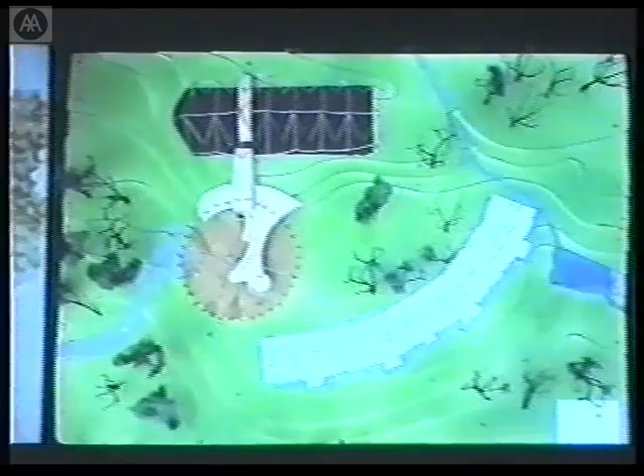And some models which we studied. On the left side was a central building, and just a tent out of wood, because we said that we could use those wet trees. The forest was planted, I think, in 56, and the trees did grow to a height of between 12 and 15 meters, very thin, and we tried to make buildings out of wet wood, where the wood should be drying in the building. As an experiment, because we had not the time to wait until these trees could be dry by themselves. Next pictures.

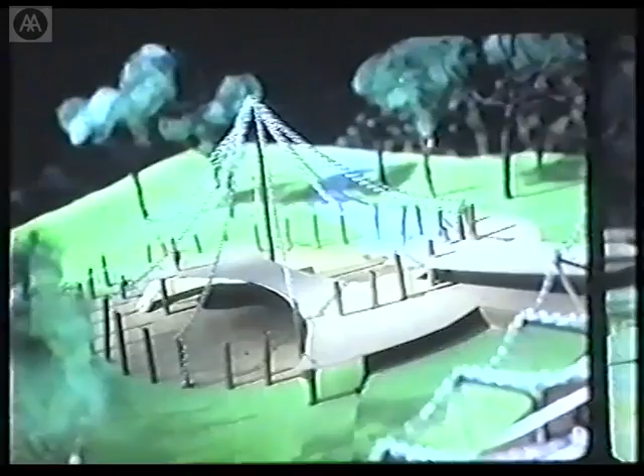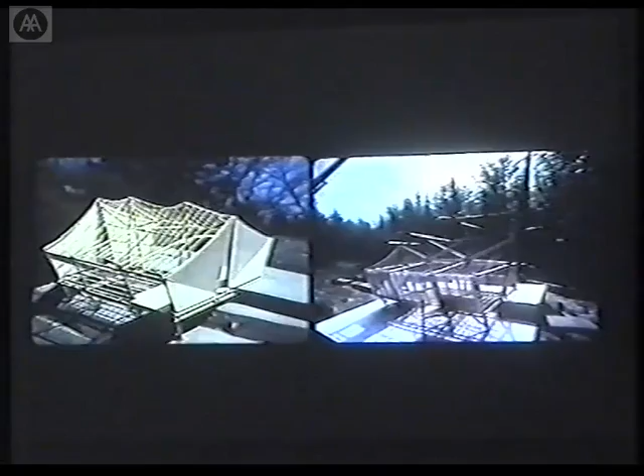This is the so-called master house. It is hanging trees from the ridge. On the right side, we studied the model on the site. If you have a little model, you should go to the site and look where the best site is. The site was beautiful. We remember the day when it was the first time on the site. The ground was blue, from bluebells. It was really beautiful. Next picture.

This is now the ready building. How you call it, master house, or I don't know what is the official name now of the house. There's no official name, but some of you are going tomorrow to Hooke Park and will see it. I have not seen it now for many years. I hope it's still existing.

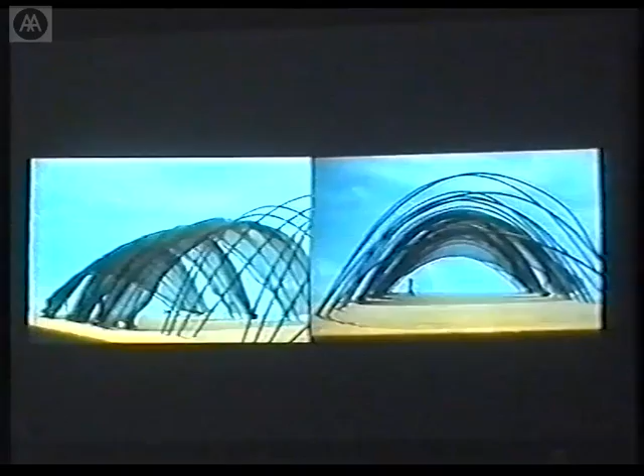Next picture, please. And for the workshop, we made models out of very thin stainless or brass bars, studying the shape. Later on, I used once more these experiments for the World's Fair in Hanover last year. There was a young Japanese architect, he's now pretty much known, Shigeru Ban, and we made the building together. But before we made Hooke Park, next picture please.

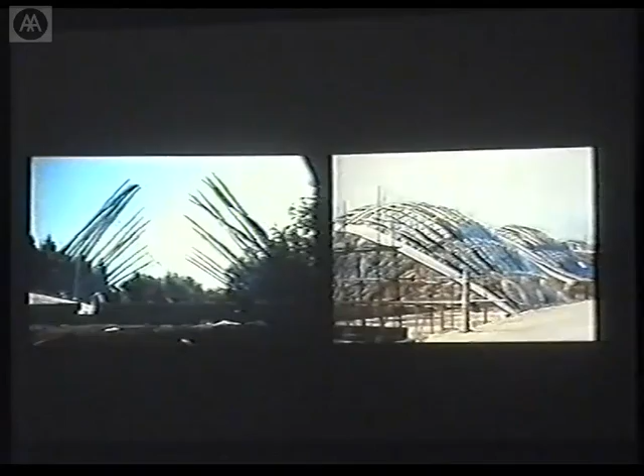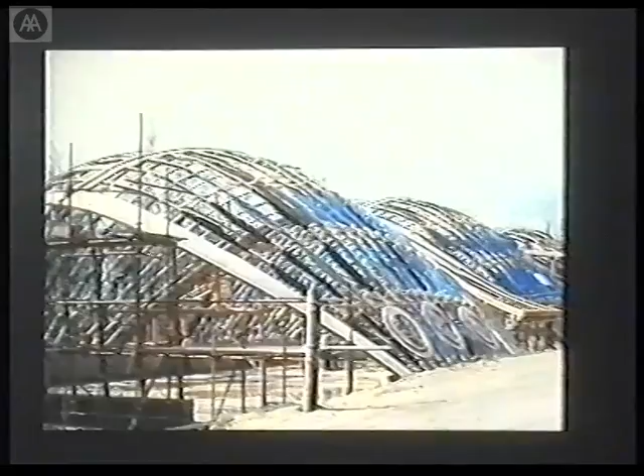And it was like this. You see the very thin members. We studied, of course, how they could be arches on the right side. We pulled them down to make a grid shell out of wooden arches, bending it just by power. Next picture. And this is then the workshop building. We covered it with a tensile membrane out of polyester, PVC coated. Next picture.

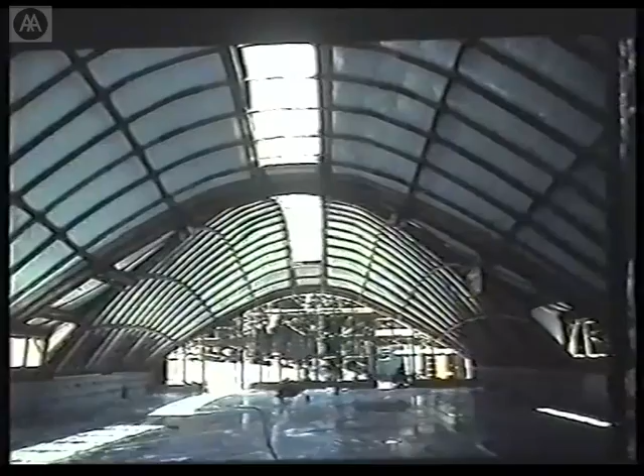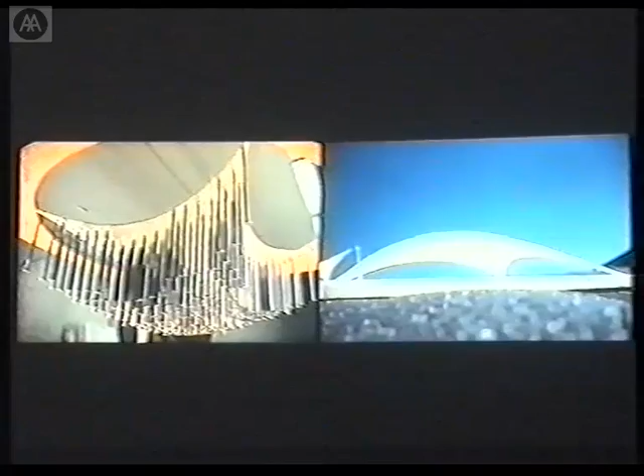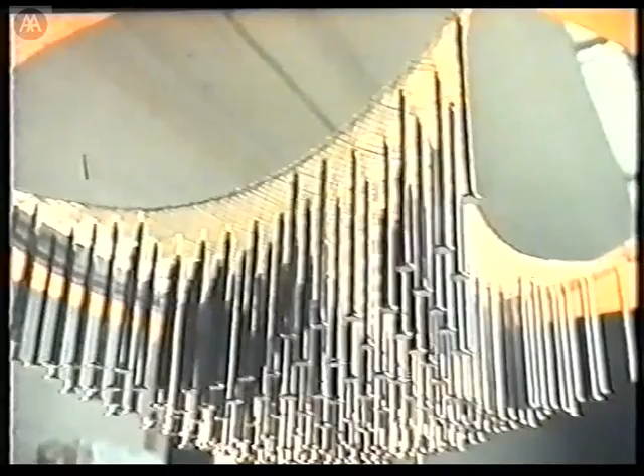And I will tell a little bit about modeling and how to bring buildings out of models. These tests I made in 1958 with my class at Washington University in St. Louis, USA, showing a rubber membrane loaded with nails, and later on converted to make it a shell under compression. We call all these structures shells without bending. They are related to old vaults, which were invented long before the Romans. Next picture.

My largest building was the so-called Multihalle in Mannheim, done together with the architects Mutschler and Langner in Germany. The engineers were Ove Arup and Partners, at the time when Ted Happold was the leader of the so-called Structures 3, a kind of fire police for problematic projects. But it happened that Ove Arup asked me, if you do a building like this, I would like to do it. And it happened that the German engineer we had on site, whom we should use, said that it is too much for me. I have not the courage to build this building.

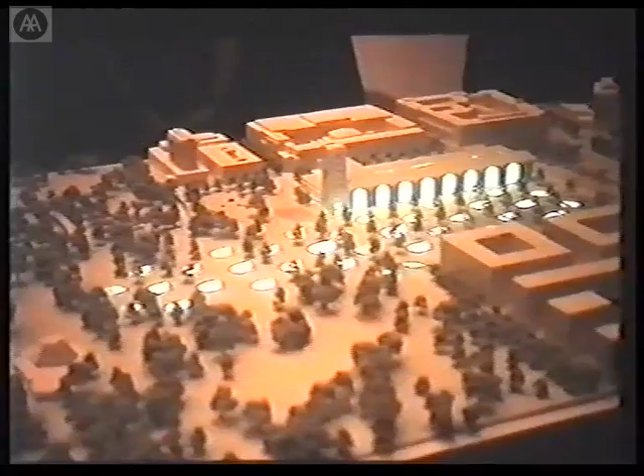And the trains are on the upper level. It's a so-called end station. And this station should be turned into, I don't have the English word, a through station, which is at a right angle. And on the right side you see our design for the competition, to be 12 meters under the ground, and to have open holes which are supported by columns.

And I offered to Christoph Ingenhoven, firstly the engineer, of course, the Bureau Happold, and especially involved is Michael Dickson and now also Ian Liddell, and joined them together with Fritz Leonhardt, the very well-known German engineer. Maybe you know he invented the concrete television towers and built many suspension bridges.

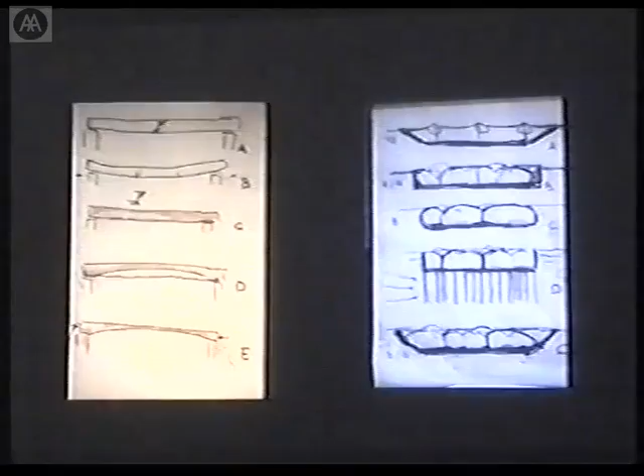So, next picture. But how to solve the question? I give some sketches because the railroad station is only between 9 and 12 meters underground. It is 430 meters long, nearly 100 meters wide, and had only a room between the surface of earth and streets of these 9 to 12 meters. Very important is now how thick you could make the ceiling, which should be planted, because the room is going away.

And so I remember, if you make a big concrete plate, it should be nearly 2 meters thick. We decided that it is necessary that the columns are about 34 meters away. It should be a very, very flat space. It would be the largest space of the city of Stuttgart. Stuttgart has about 600,000 inhabitants, but all around are about 2 million in the so-called outer region.

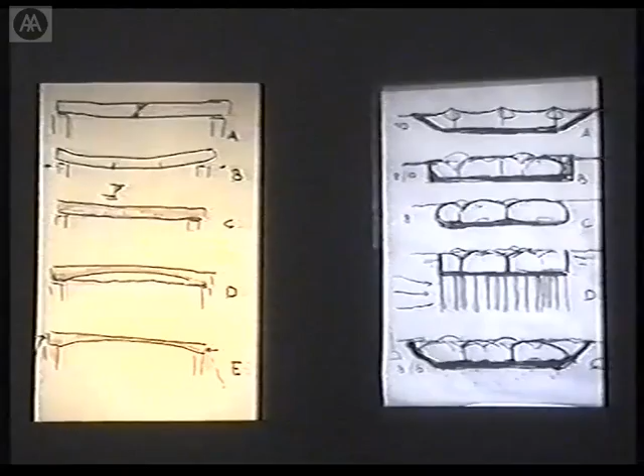And the question is always how good is the knowledge of the engineers. And we know that to calculate reinforced concrete, it is somewhat, I will not say superficial, it is very good for normal buildings of small span. But for longer span, there are problems, because normal concrete always will break. You can, of course, pre-tension it, but with pre-tensioning you can bring the 2 meters down to maybe 1.50 meters, but not more.

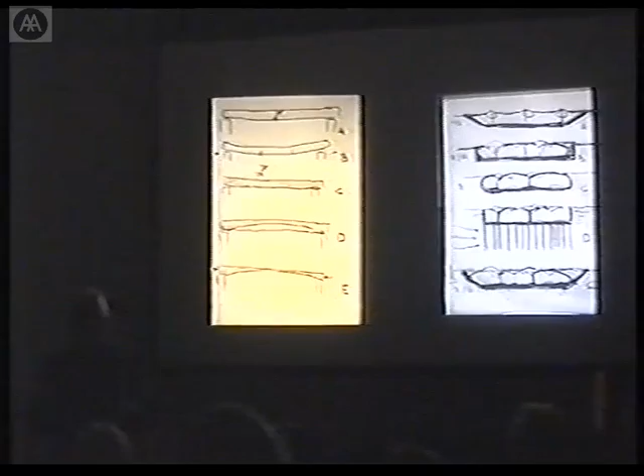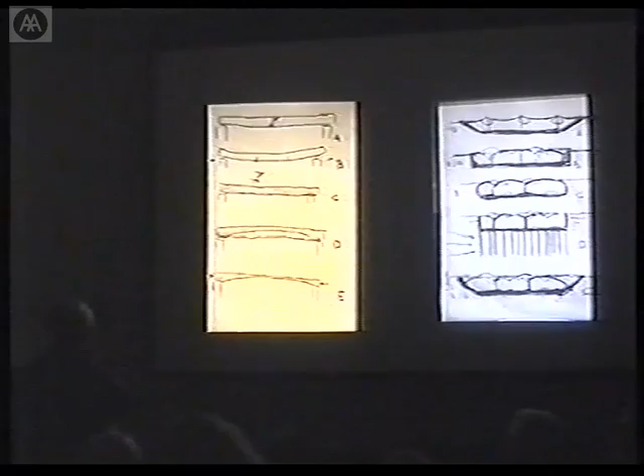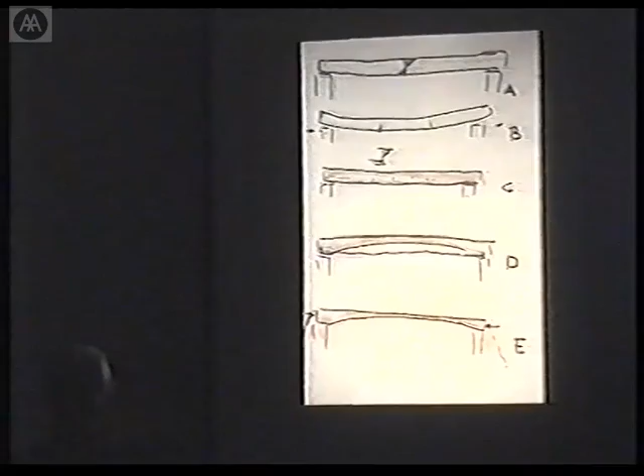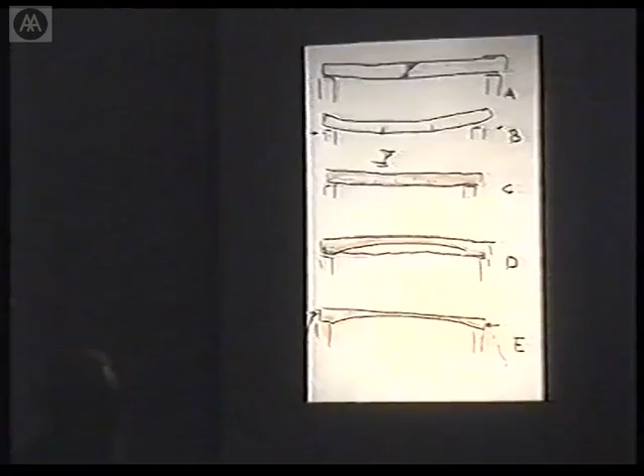And you are calculating with the elastic theory, but there is another way of calculating it. I show you on the left picture. If you put all concrete away which is not in compression, then you will have a two-dimensional thin shell in the concrete. And you could also calculate it in a way which is shown on the left side. But still, then you would have the tension members 2 meters underneath, and we could not use these tension members.

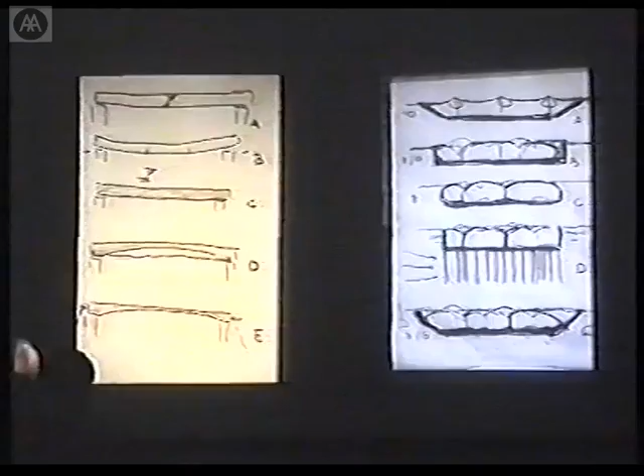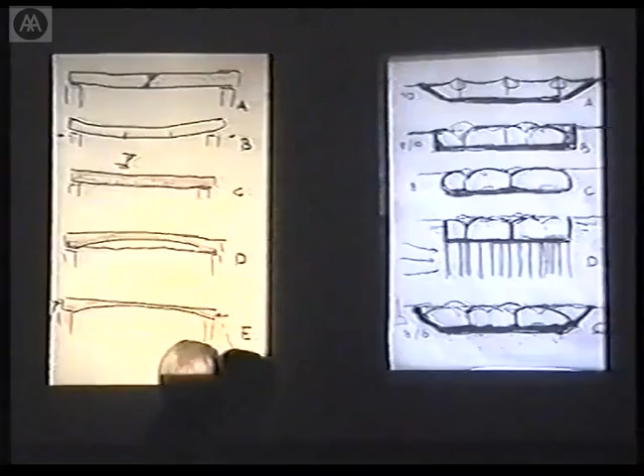On the right-hand sketch, you see the many possibilities which we had to solve this incredible equation, and just to dig a valley. The valley will be filled with groundwater in a few minutes, because the railroad is crossing a little stream going out of Stuttgart. Stuttgart is a huge funnel, and there is big water sometimes in rainstorms. So the first upper line was what we did at first, to make this valley and to hang over the valley a tension structure.

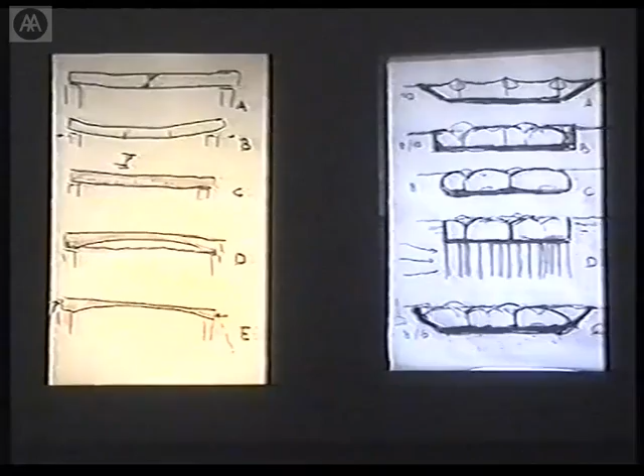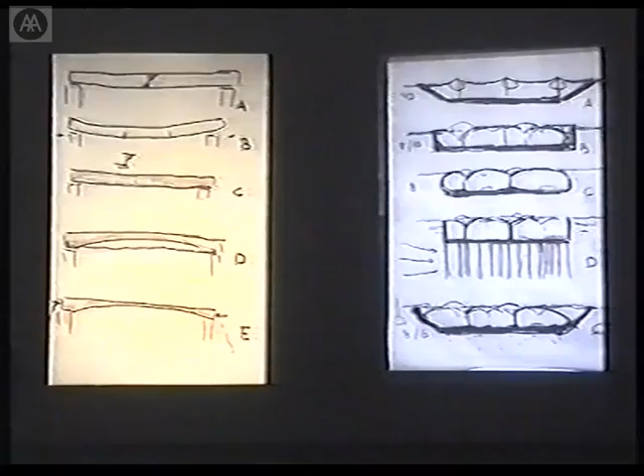But then we started also because the client wanted a section which is under the second sketch there. We studied all different ways, and we are still studying, because it may need 2 further years before the building will be started, and it will not be ready before nearly 2020. It's a very, very difficult question, and I do not know if I will see the building. Next picture.

And for the first step, of course, you are always using things which you have done. So I was thinking for the railroad station Stuttgart to use a cable net, which I have done for this building. Next picture, it is the Montreal Pavilion. Or for the Olympics, we had a cable net, and we studied also to use the cable net and to plant it. Next picture.

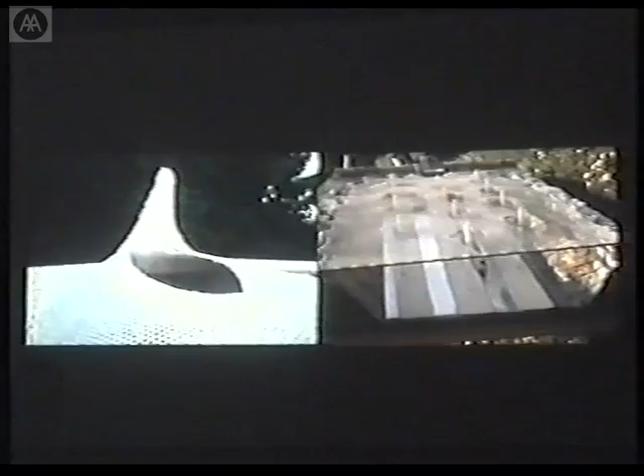And this solution was coming out at the beginning, but we had only 3 months' time for the competition. You see the cable net, and this would be the structure. Underneath the point will be a mast, and I tried also to reduce the railroad station. That's for 6 lanes, but we have to build it now with 8 lanes. Next picture.

Then we studied the so-called hydrostatic shell. In the ground, and you know it from the London subways, the best shape of a tunnel, especially in groundwater, and we are here in groundwater, is the shape of a tube or a fire hose which is filled with water. This is the so-called water shape, and you can reverse this into a shell and you get shapes like this.

Of course, they are difficult to calculate. Next picture. Next, please.

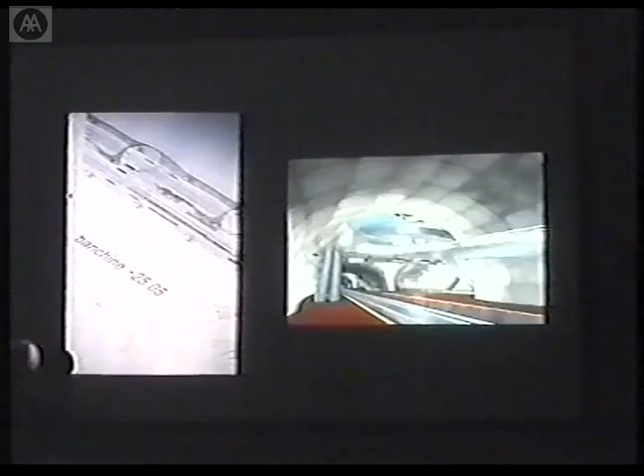We have done it. We have been invited by Italian friends and architects for a competition for the railroad station in Florence. And we offered such a hydrostatic shell, but this is much lower. It is about 24 meters below the city of Florence. The tunnels are driven just underneath the city.

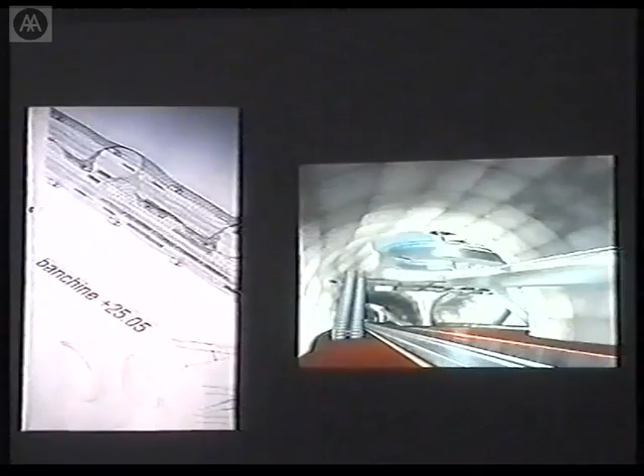But it is possible now to calculate it, to do models and to calculate it, and also the groundwater flow is above the tunnel, between gravel, and we should not destroy it, because the plan of the Italians was just to make a big caisson, and they stopped all groundwater. It will become an ecological problem. Next picture.

But once more back to Stuttgart. If we have to solve this problem with a kind of a shell, we have once more to study what is a shell, what is an arch. And since Hooke, the famous physicist and mathematician, we know that we can invert a hanging chain into a self-standing arch, or a grid of chains into a standing shell.

As I have shown you with the Gaudí model, Gaudí used this method just 100 years ago, but before there was a German architect for the city of Karlsruhe and many others, but no one has proved this idea: I take a chain and let it stand, and the standing arch in the best shape is exactly like the hanging chain. So I used those methods at my Institute of Lightweight Structures in Stuttgart, and we made tests, built it exactly as an arch, even also under load on the right side.

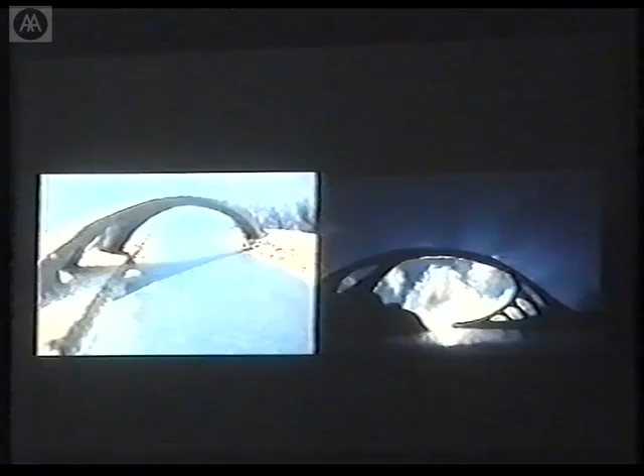When we made these studies, automatically we came to a shape, and here we invented an S-curve arch, maybe to go over the water. Very often a street will move from one side of the stream to another one, and automatically you need an arch which is in floor plan an S-curve. And also we made the design for a bridge which has a floor plan more like a U. Next picture.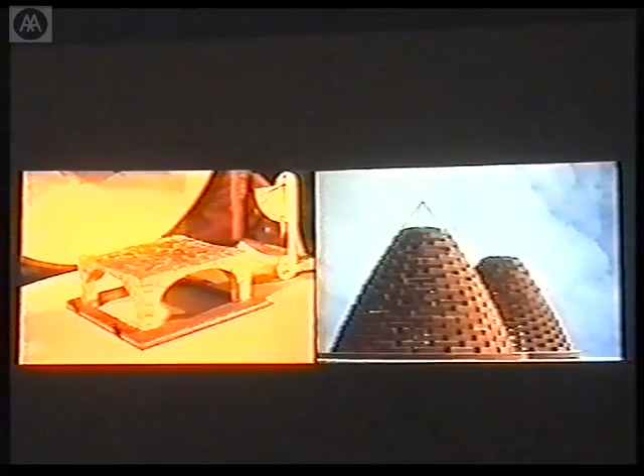And in this way, to make a shell without bending, and a shell without bending is always a vault, especially out of concrete. It starts to break, and it's out of stone. The oldest method to make it is a so-called cross vault, which is standing. This little model is standing without collapsing, but it's out of wooden stones. It doesn't matter if you make the model out of wood or stone or lead. You can use all materials, because to get the shape, the material is completely free. Only when the material is too flexible, then it could collapse a little bit earlier.

On the right side, this is the oldest method to make roofs or walls with stone, the so-called free laid dome. It is not even necessary that the stones be joined together. The friction is enough. I was many years ago on the Shetland Islands, and I discovered that about 2 or 3,000 years before Christ, these kinds of domes had been built, meaning 5,000 years ago, in the Shetlands. They are now broken, but the base still exists. Very interesting how early people in your country started to make these buildings.

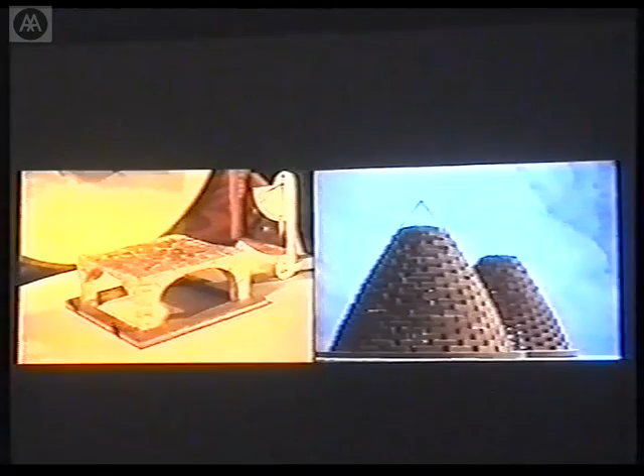Next picture. But we are still on the railroad station Stuttgart. How to do it? To combine an air hole so that air and light can come into this huge space. Believe it, 100 meters by 430 meters. And we made this model on the left side.

The model was hanging out of a very thin woven material, then powdered with plaster, then dusted with water, and the plaster got hard, and this model came out. Always we try not to manipulate too much, just to discover those shapes which come out by themselves. It was the model where we then, in the team of architects and engineers, decided we will go this way for the competition. Next picture.

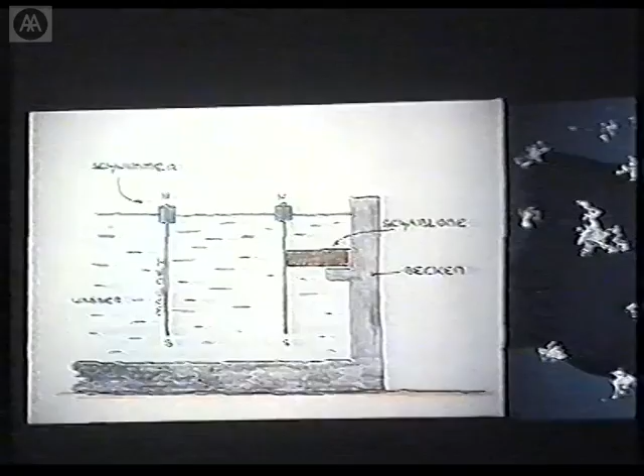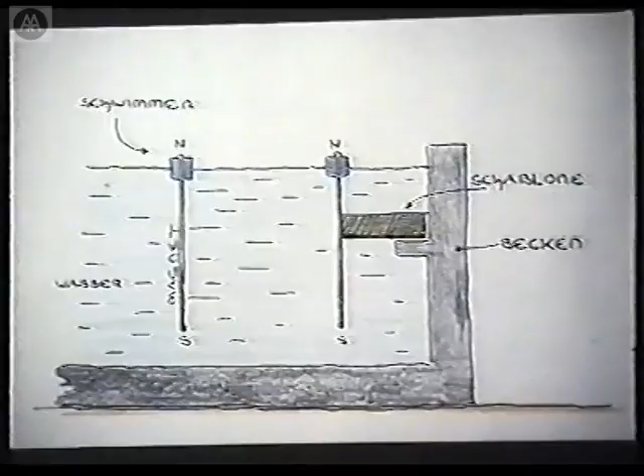But how to put the columns? Should we use, like, the model? Of course, the model we just take a square grid. We are a society of right angles, a Cartesian society, right angle, right angle. But if you want to test how the columns should stand so that every column is taking the best space, we invented a method

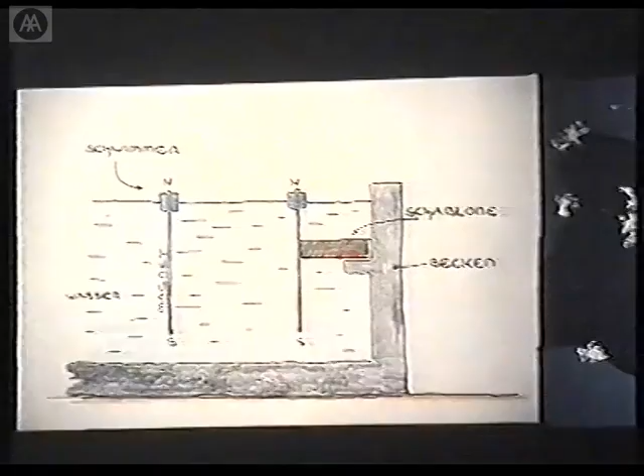which is this one. We take little needles, make them magnetic, put a little point of styrofoam on there, and if the magnetic forces are parallel, so that always one pole is above and the other one below, then they have the tendency to swim apart. And if you have a closed frame in water, they fill this frame in the best possible way.

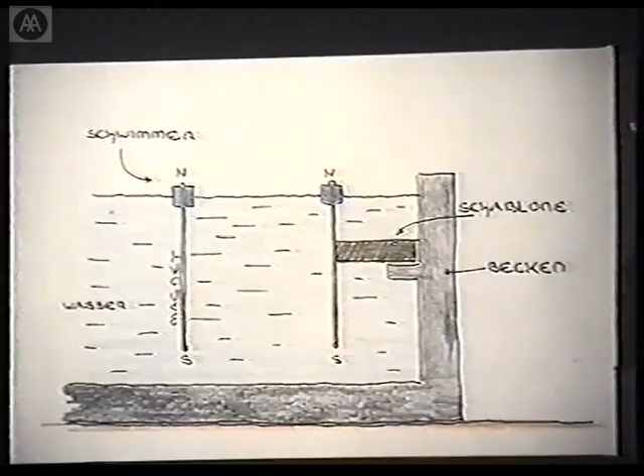One experiment on the right side, the big dot in the middle is always the needle, and you see they have a kind of triangular grid. And the land, or the water, which they are using are then more hexagons. And we invented another method so that other pieces are joining together. If you have a very thin styrofoam and you put it on water, then they start to pull together, just vice versa than the magnetic needles.

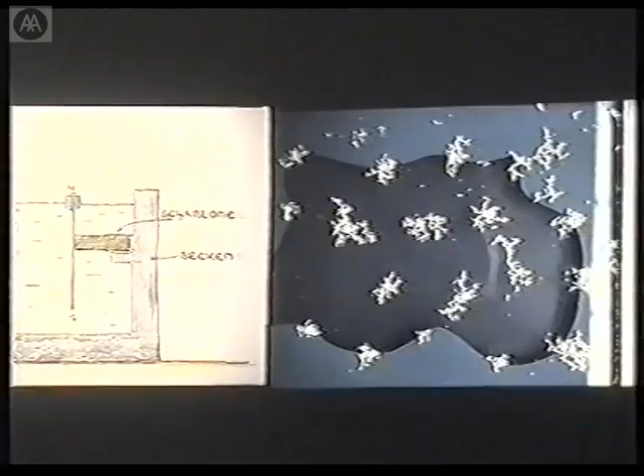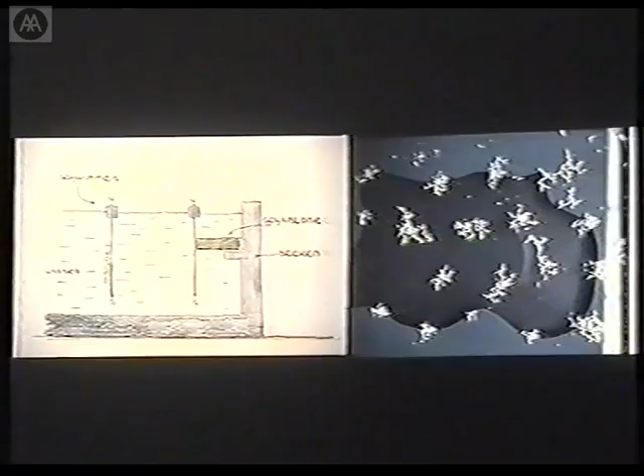And with this play you could study cities and how man is covering earth, all the earth which higher animals are using, like eagles or foxes. And we made these studies also. I developed it much earlier, and then changed the position of the columns. Next picture. And we made then the columns in a hexagon grid.

And in the soap bubble, if you put a little hair inside and destroy the soap bubble in the middle, then you get an exact round circle. But if you pull on one point in the circle, you get a shape like this. I used the shape for many buildings. I have shown you our Montreal pavilion, and also for the Olympics in Munich, also for my institute. You get a wonderful curve.

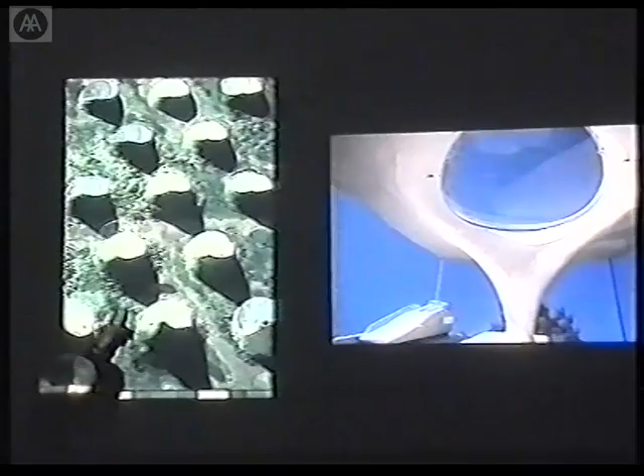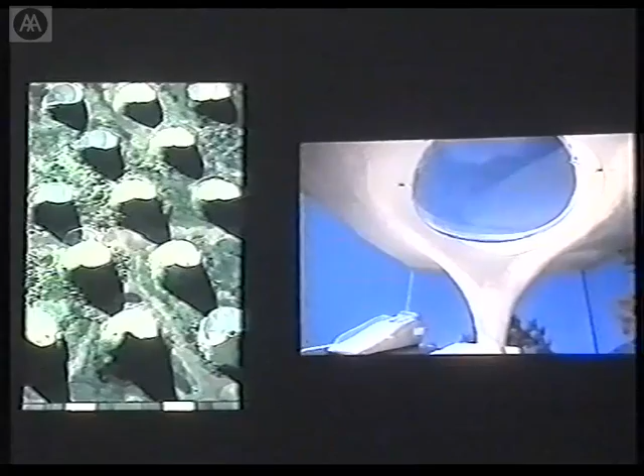Next picture. And we used then this line, and you see how the holes are now put in order, but a little bit disturbed because they should stand in the middle between the rails, so that people can see it well. And from a certain line it looks nearly like a circle, but it is a circle in space. Next picture.

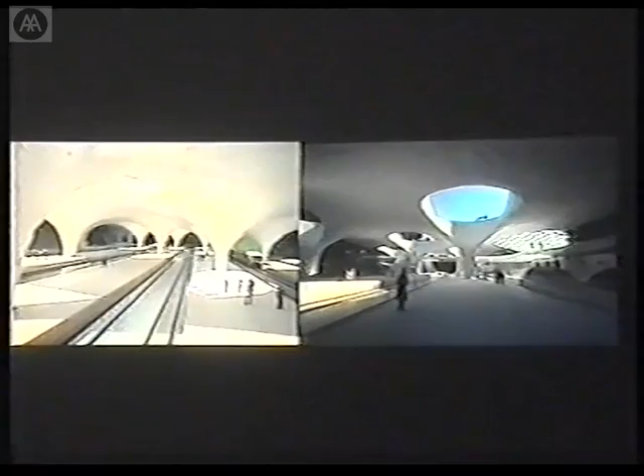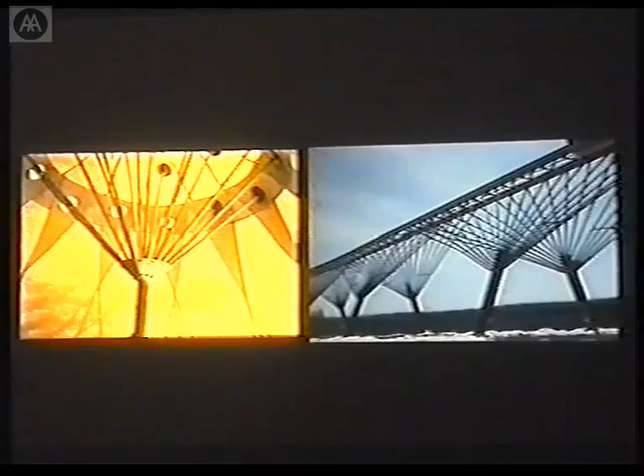And this was the answer, and with this model we did win the competition. And we were, of course, happy, but then the big work started. And so we are now, you will not believe it, 6 years on the work. Next picture. This was the railroad station, Stuttgart. Now,

just 5 weeks ago, we could open 2 new bridges, which we built, and I show you a little bit the history. It's a footwalk bridge, 120 meters long, but the story was always you could use straight bars to solve some structural problems. I used them for a so-called hump tent, which we built in 1957 with a great tent maker, Peter Stromeyer, a tent which is curved like this with straight bars to connect the canvas with a pole.

But be careful: at the point when we wanted to erect the tent, it did collapse, because it did turn at this point, and so we had to make the little funnel underneath. The collapse was not a problem. The tent was only 24 meters spanning, and very, very light, and my friend Ewald Bubner did direct it and nothing happened.

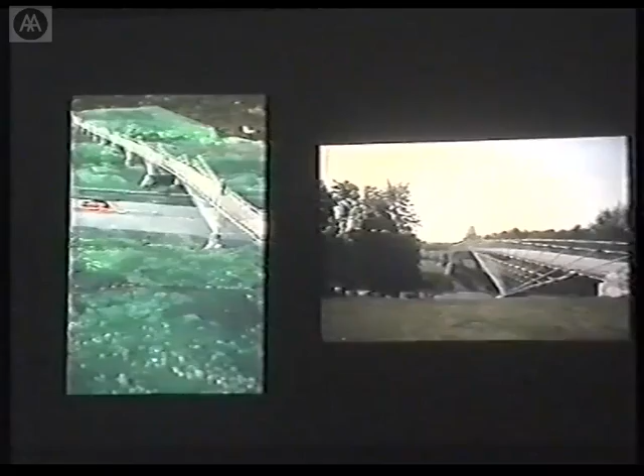But the bridge which we opened just is similar. The model is on the left side, and on the right side is the execution. We made a new trial. We did not build the bridge out of steel tubes, but out of steel bars, full bars of 70 millimeter thickness. And the whole bridge is only clamped with a special clamp, only one clamp, but which is turned, and all the bridge is zinc coated.

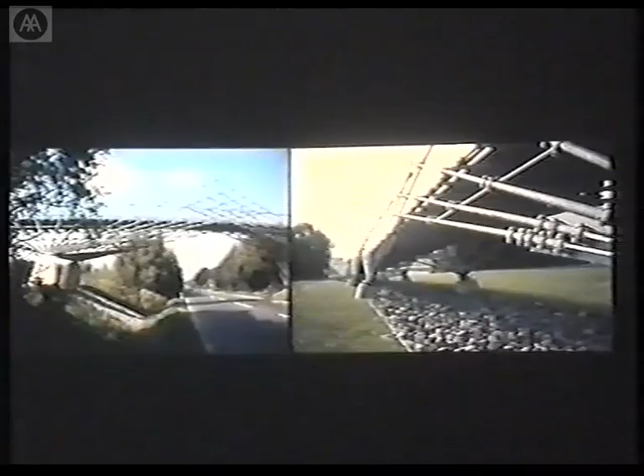As I said, 130 meters long over a street. You see the street will be enlarged on the right side. It's still small. And over a little stream behind. And in a slope. Next picture. These are details. We developed also the clamp with 4 screws. Next picture, please.

It looks on the right side pretty large, but 70 millimeters are really not. It's just like this. The bridge is very, very stiff. Only those bars which are above the walkways, they have a light tendency to swing, but under the footwalking, the bridge is moving nearly nothing. And I wanted that it's only clamped, but the engineers, this time once more, Bureau Happold together with Bureau Hilbers in Berlin,

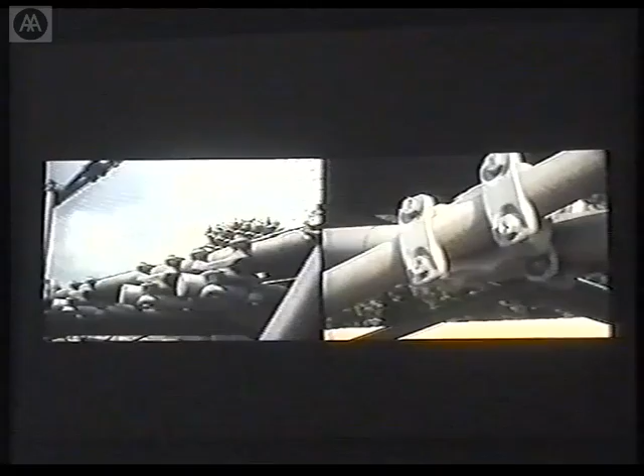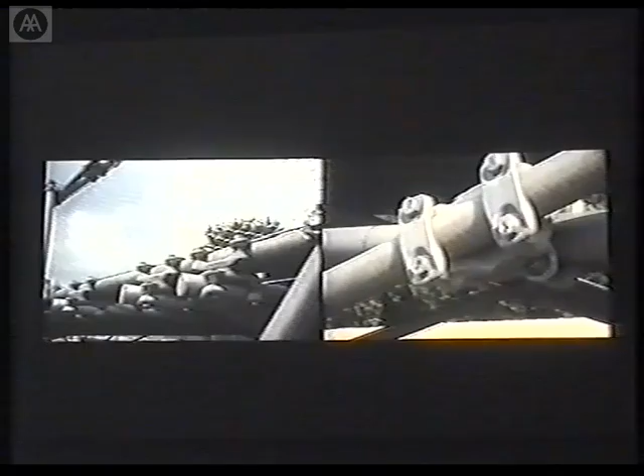we all wanted it only to be clamped, but then we had a proof engineer, and the proof engineer should understand also, but sometimes if he doesn't understand, he was demanding. And so some of the points have been welded, which I don't like. But normally the bridge is only screwed. And next picture.

I'm coming now to another method of design, which was also developed out of models, this so-called tree construction. Of course, in a living tree the branches are always in bending. And I don't know why the living tree was invented, because branches in bending need most of material. But living nature is not invented for a certain goal. When a thing is in living nature, it is then developed and developed. But you can use this type of structure especially when you put them in compression.

The model on the left side I made with my students at Yale University, 1960. It was hanging like the Gaudi model, not wires, very thin threads, which we bound together and then stiffened with polyester, just make it wet with polyester, and we could help the model in taking an upper plate.

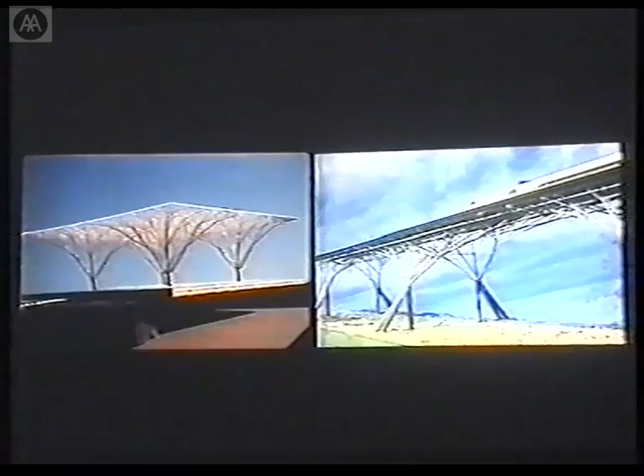But we used the method then for our second version of the magnetic railway on the right side. And in this time, Norman Foster used this in a little different way, but the method of calculating, for the new London airport, Stansted. Next picture, and a very peculiar thing. This was the tree structure for the Parliament of Saudi Arabia, which we did not build, but it was published.

And now, if you enter Stuttgart, you see our column there by a very well-known German architect and a very well-known German engineer. The only trouble is they did not ask us. But Rolf Gutbrod, before he died, rang me by telephone, said, last not least, from the huge project for Saudi Arabia, a governmental building, at least a little piece is standing. Next picture.

But you can use the method also for a very small thing with no real functions. I made a little sculpture for a poet in our village, a well-known German poet, always making poems for nature, and so I have given him this type, a real tree where water drops are coming out, falling in the basin, which is the old fountain of the village. Next picture.